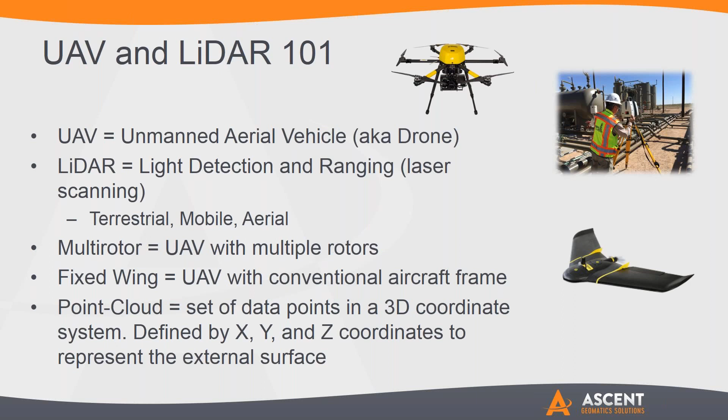And then ultimately, what we're gathering with all this data, whether it be UAVs or LiDAR, is point clouds. A point cloud is just a set of data points in a 3D coordinate system defined by X, Y, and Z coordinates. Essentially, we take this 3D model and we're able to deliver 2D deliverables, but we can also do a whole lot of other things with it. It's just a very dense amount of points that we can slice and dice any way we want to give the customers the deliverables they're looking for.

In order to be able to fly commercially a UAV, you need to have either a 333 exemption or Part 107. The 333 allowed us to get into this game very early on, a couple years ago, because the FAA mandated that if you were going to fly drones commercially, you needed to have an actual pilot there as you were flying, and luckily our CEO is a pilot, so that allowed us to get into this game pretty early. In August of last year, they created Part 107.

Part 107 allowed a lot of different people to be able to go out and get their remote pilot's license. They just have to go in and take a written test and pay a little bit of money for it. So that's good and it's bad, and I'll talk about that towards the end when we wrap up with recommendations. But we also have our Part 107, and we have a number of pilots in-house that have their Part 107 remote pilot's license.

BVLOS - a lot of folks ask, well, how far can these things fly, or how high can they fly? It's really not a limitation of how far they can go, they can go quite a ways. The limitation right now is this beyond visual line of sight. Currently there is a restriction from the FAA that you must be able to see the UAV, and not with binoculars or any other tools, you have to see it with the naked eye. So generally speaking, Owen, how far is it that you're able to see and not lose it? Well, if I'm clear-eyed, probably about 3/4 of a mile from my location.

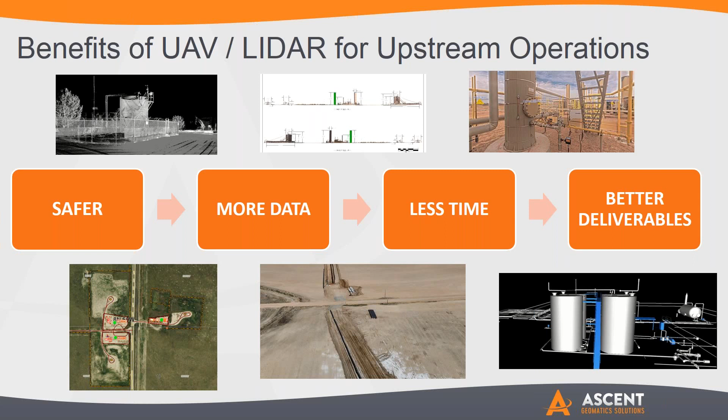And then better deliverables. Ultimately, we're still going to provide the 2D deliverables that our clients are used to getting today, but we're transitioning into also providing 3D deliverables that help them make different types of business decisions.

And then I would also mention engaging marketing. This can be good in a whole bunch of different ways from a marketing perspective. Pipelines have been getting a lot of attention the last couple of years, so being able to go out and fly that route and get information pre-construction, maybe post-construction, some of those things—but also to provide to maybe some of the landowners and things like that as well. So there's a lot of marketing sides to this when you capture that data, and everybody loves a bird's eye view.

No, I think public outreach is a big component—it's a side product we're getting while still collecting real survey data. We get all these visuals, and we'll dive into a couple of those here in a little bit. Kind of really wanted to go into the next steps of what a point cloud is and what we actually get out of all this data.

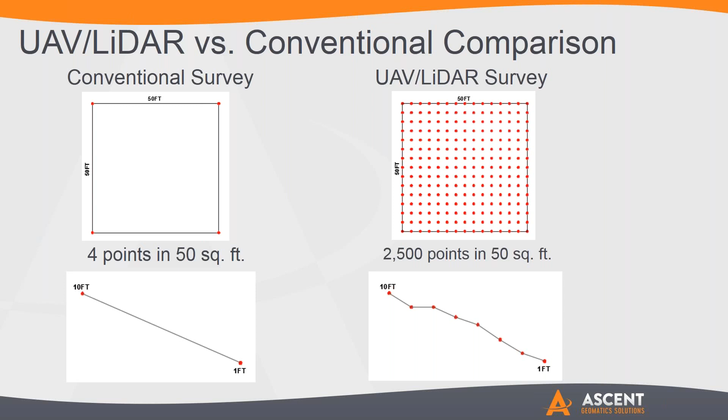Great. And so maybe we could talk just a little bit, Owen, about 2D versus 3D data.

Yeah, exactly. We're saying 2D in the sense that it's a two-dimensional plat, an alignment sheet, a literal paper-style product that everyone still needs to get work done. We're still going to produce that, and it's based on survey points, which again are 3D points, but it's just displayed and shown in a two-dimensional platform.

We're able to take this drone data, still produce that, and then create these three-dimensional point clouds and 3D meshes and all these other type of products, which you'll see on the right side of the screen there, that give a whole other element, which we'll dive into the benefits of - EH&S, progress reports, and enhanced routing and planning perspectives - here in just a little bit.

But the idea is that we can take the three-dimensional data on the right side and still transform it into the standard products that you would expect to receive. Great.

And then, again, some of the overall benefits that we have: location reconnaissance, that's huge when you're dealing with corridor concepts. There's a lot of features that could get in the way and a lot of different items that could cause either minor or major reroutes as you're diving into a site.

Most people hop in, use Google Earth, and try to plan out on the front end. That's a snapshot in time from a certain season - you may not notice a wet area or other potential items that could cause issues. Location reconnaissance is huge in order to get enhanced route planning using these types of technologies.

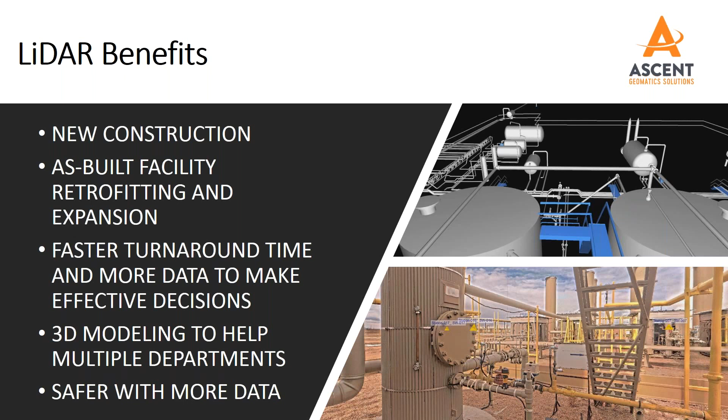Okay, great, and thanks for that, Owen. So next, what we're going to dive into - again, high level - and then after this, we'll get into a lot of examples. We're going to be showing a lot more media and visual examples of what this actually looks like.

But just for the sake of understanding high level, where are some of the applications for UAVs in midstream? Michael, you want to talk to this one real quick? Yeah, so the basic tenets of using UAVs for midstream is on the front end - it's very applicable to doing route planning.

Typically, our workflow, we get a KMZ or something from a client, and we can go ahead and plan out our flight for that KMZ. But during that collection, we're collecting a much wider swath.

We can go back and review that route with the client and make minor reroutes based on cultural features or topography that we pick up during those flights, and finalize those routes. Due to the fact that we collect such a large swath, we're able to stay within the data set collected, while conventionally we'd maybe have a 200-foot wide window. So routing around features not on Google Earth while we're in the field, we're able to leverage that data collected and do reroutes on the fly without having to go back and collect that stuff.

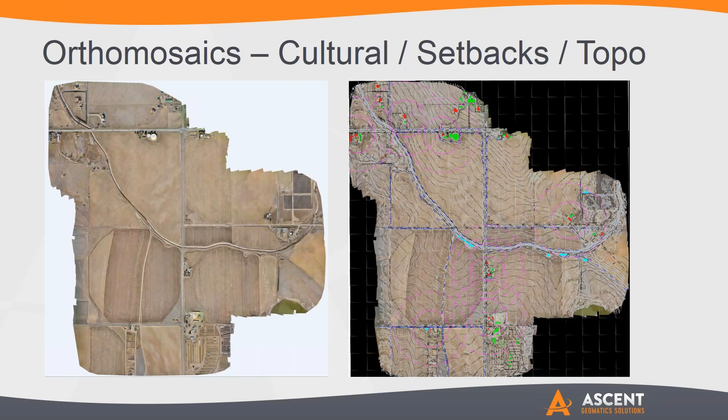And if we're able to fly it when it's either brownfield or in the off-season of growing, we can tighten it down from there as well - we can get down to values of maybe just around a couple inches plus or minus, which for a lot of the work we do is great intelligence.

Okay, great. All right, I'll let you off the hook and move to the next slide. So what are we looking at here?

And just to make the distinction here, we're not telling folks not to use Google Earth. There are purposes and reasons for using Google Earth, maybe even pre-planning, just kind of generally getting an idea of where we may want to put this. Certainly you could use Google Earth for that - we do that ourselves. That's not how we completely plan out.

But the idea is that we can go and take this imagery, and you literally get a KML from us, and you can plug that in, and you can have all your Google Earth features with that new imagery under it. And I think we actually have an example of that right here - yeah, there's a great example.

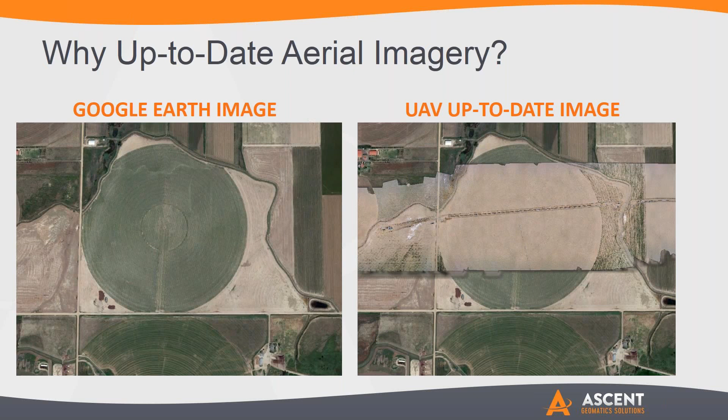So when we say UAV up-to-date image, it certainly was up-to-date that day. Just for kicks, I pulled up Google Earth yesterday, and that's actually what Google Earth still shows as of yesterday. So as we all know, using Google Earth, it can be 3 months or 3 years old - you just never know. And obviously, as you get further away from metropolitan areas, the less updated it really is.

Okay, so let's look at an example here, and I want to preface this next piece. This is a video that we're going to be showing. It'll be really smooth on our computer here, but it may look a little choppy going through this GoToWebinar connection. So if it seems like it's coming through a little slower, bear with us. If you'd like to see what this looks like in real time, let us know.

Now, before we show this, I think it's important to mention what we're actually looking at is data. We're looking at data that also has that combined imagery to it, but this is not one of our drones that's just flying and taking video. In fact, you can see off to the edges there that it's not.

This is kind of during construction, but in basins where there's a heavy corridor, this wouldn't be uncommon - this is your planning phase where there's already construction going on and you're trying to abut against it. So what we're really trying to show is when we're doing the planning phase, we can see roads, like for instance, we just went over that we're going to have to bore, which was a bore we just did.

You can see in the far off distance a landowner that we had to bore completely because of restraint. If we weren't able to get permissions there, we'd collect that data anyway. This is the actual data underneath that mosaic, and we're able to pick up numerous amounts of data. The width is closer to a quarter mile, so if we had to do that with boots on the ground, it would be exorbitant.

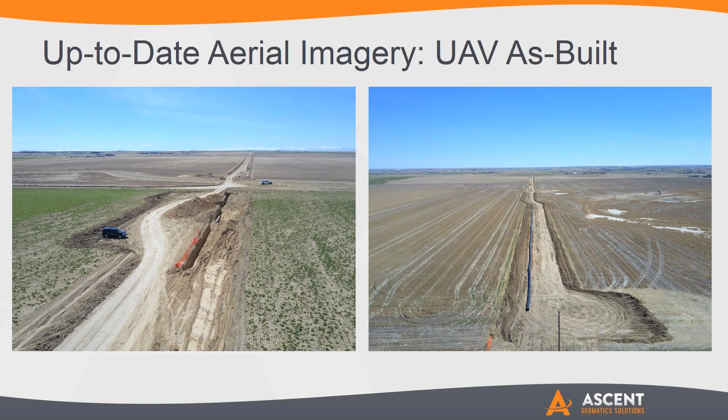Just to point out, if we're out there collecting updated orthomosaics or getting anything for versions of progress, sending a bird up to get these type of photos or literal video is really quick and easy, because not everyone can be on site at the time. Someone sitting back at the office may not be able to see the construction progress, and a point cloud may not be the right vessel to portray where it's at. It's a great progress and as-built tool that only takes 2 minutes to get done while already there conducting a survey or an aerial orthomosaic.

So this next one, this 3D point cloud fly-through, now we're actually looking at, and we're jumping ahead a little bit, this actually has LiDAR data in it. Owen, you and I were both on location here, but you were actually doing the data collection. You want to walk us through this one as I hit play?

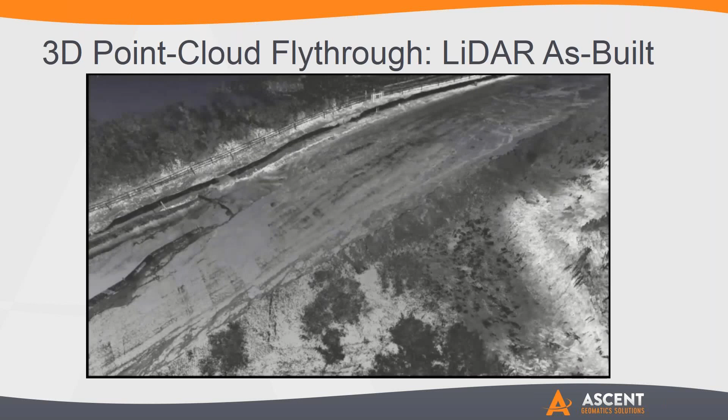Yeah, definitely. So again, this is a proposed corridor, and right now this is obviously, as you can see, an as-built under construction. It was paralleling an existing utility corridor, you can see the transmission lines there. We gave a little aerial view there to give you perspective on what the LiDAR data is showing. Essentially, what we were able to do is go out, and in just a little bit you'll actually see the collection method itself. We collected this with LiDAR on a backpack, so it was a mobile LiDAR system that we can use to measure out the size of wire and the sag of wire.

We can calculate into that disturbance to see if we're staying within where we're permitted and legally allowed to be, and figure out if there are additional data pieces we can collect on the front end for routing, and also once we have that control, collect it for the as-built or progression. You can actually see right now there's a guy down there with a backpack.

That's the system we use that we can just walk around with. We get all that detail in the bushes and shrubs down there, an immense amount of detail, all off of this path, which was probably 15 minutes worth of walking. We use that on corridors, and then we can also use it for facilities. It's detailed enough that we can actually collect valves and small pieces that require millimeter-style detail and accuracy.

So moving along, another area here, Michael, maybe you can speak to this vegetative regrowth concept. Sure. I think you saw where there were some disturbed areas, and since this is always georeferenced data, we can overlay our proposed route to that and see any deficiencies or construction outside those routes. So we can utilize that data with our right-of-way agents to let them know they may need to pick up some more temporary workspace during construction based on reroutes or whatever.

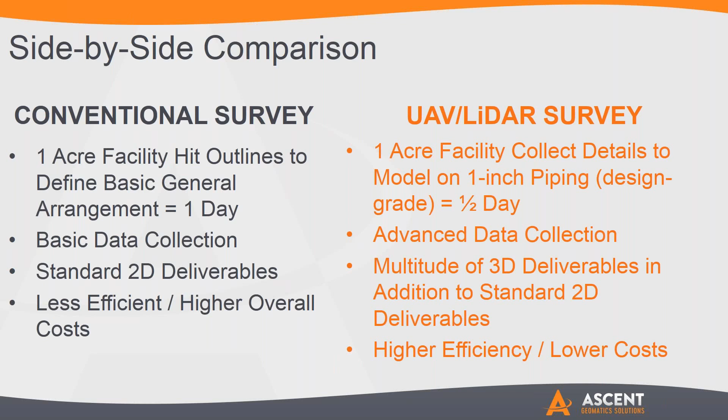So on the left here and then on the right - what do you need? You need your standard facility drawings, your general arrangements, your ISOPAC drawings, P&IDs. All of those we can still produce out of these 3D data sets, but we can also turn it into a real 3D actual modeled facility like you'll see on the right there.

This is a location that a client asked us to do a full model project on. You get the piping, you can get down to flange details, so if there's fabrication to be done, we can tie in and help them with the manufacturing of that based off real data that we collected months ago.

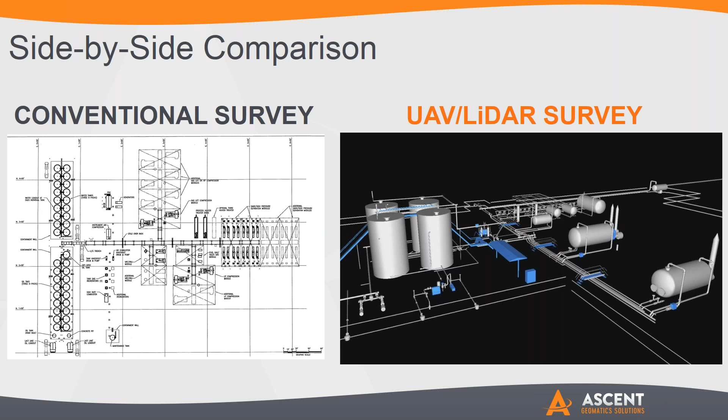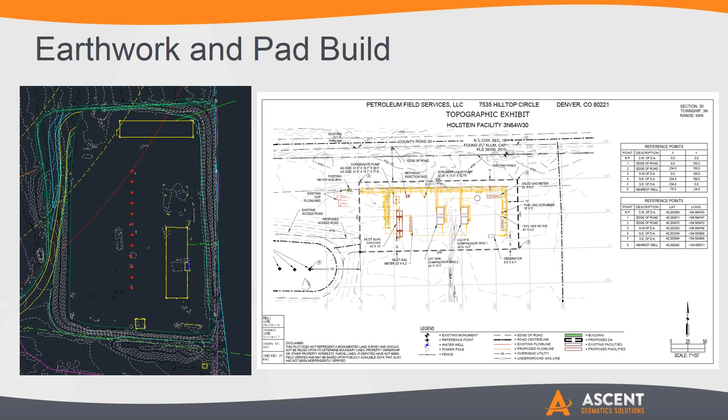Ultimately, with these items, if you're building a new location, you'd like to think that your crews built them as you planned. So you still are going to create a grading plan style product on the front end. They go out, they build, compact, add on whatever base they need. If we go out and refly a location, since we've already been out there, we can update the elevation data so that if your underground piping models or above ground facility models need to be adjusted because of vertical differences created during construction, we can use that to update the model up, down, left, right, and make sure it goes in exactly where you want it.

Okay, great. So maybe we could take a look at a couple of these examples and show examples of as-builts that we've worked on with some clients.

Yeah, definitely. You'll see here - this was taken from a photogrammetric data set, an existing pad that was under construction, being drilled out, and then a production facility being put together to go online. The nice thing about this, from an EH&S standpoint, if someone back at the office wants to look at what's going on at the site, you can see if BMPs are being followed, you can see all the swales and berms, and you get all this data on the front end.

And at the same point, you're still getting the actual survey data for the as-built itself that you need to create those tangible deliverables or models further down the line.

So if I can jump in, we're looking at the as-built from a higher view - let's call it a 400-foot view, getting that as-built, because everything we're looking at here is data. Yes, there's imagery coupled with it, but this is all just a massive point cloud, what we mentioned before - point cloud. This is just a massive data set.

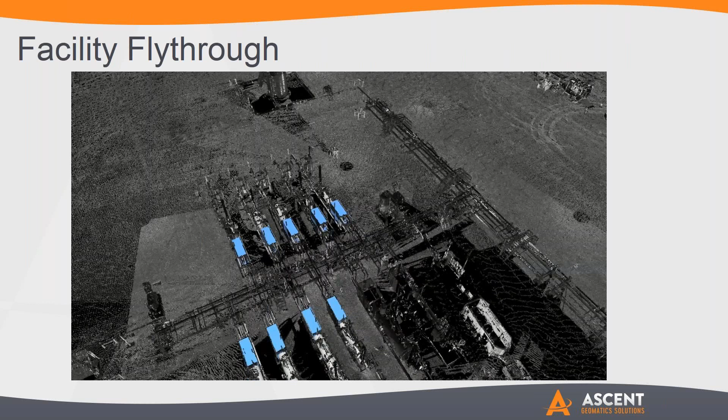And then what we're able to do is take it one step further, maybe not from a 400-foot view, but down to a millimeter type of view. We can take these photogrammetric data sets we get from UAVs, along with the LiDAR data sets we get from mobile or terrestrial LiDAR, and combine these. So now we can take it from 400 feet all the way down to literally a millimeter view, and get a better understanding of what is actually going on in this facility.

You'll see blue, you'll see white. This is an example, I think we have in a couple slides, where we show a facility that's fully modeled. But this is where we've shown how you can start to model some of these different areas of the facility.

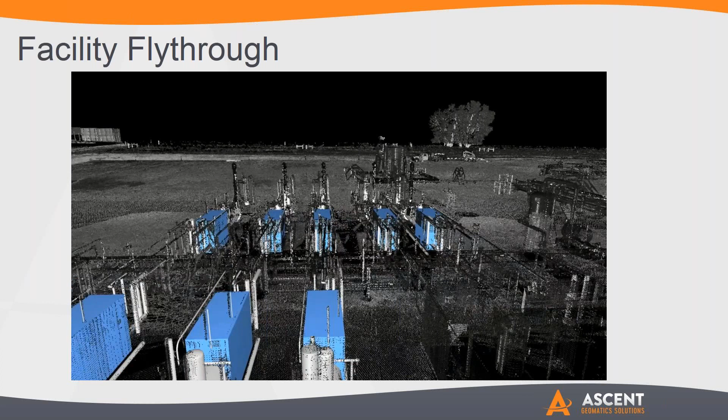Yeah, I think you hit on all those good points there. So next, maybe I'm going to see if we can do this. It's the first time I've tried to do this, so we'll see if we can show our TruView. But maybe you could talk through this, and I'll go ahead and see if I can pull it up here.

Yeah, so the actual LiDAR data set that we get on the ground with these static units, we have viewers online that someone can get a login and go to, and they can literally become the head of the scanner. So it's almost a street view, Google Street View perspective on these locations. You can click through the different setups and stations we are at, go in, we colorize them, and get them completely registered together.

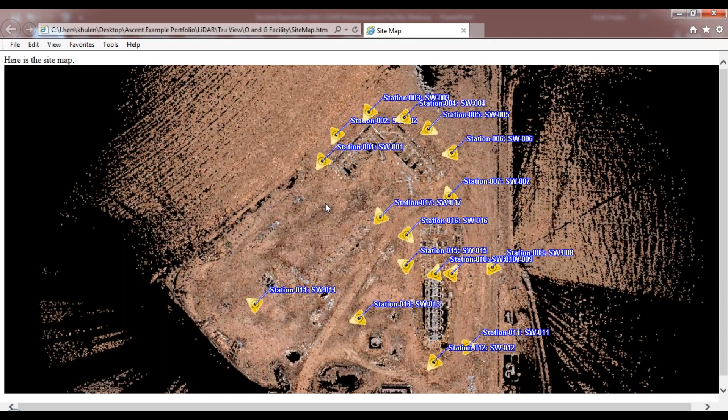So it is actual... oh good, there we go. You might be seeing that on the screen now. We're trying to get a real perspective that you can measure within this colorized point cloud. You can see points. Someone can pull this up on a tablet or smartphone and be inside the facility, and Keith here can click on this and show you what we're talking about.

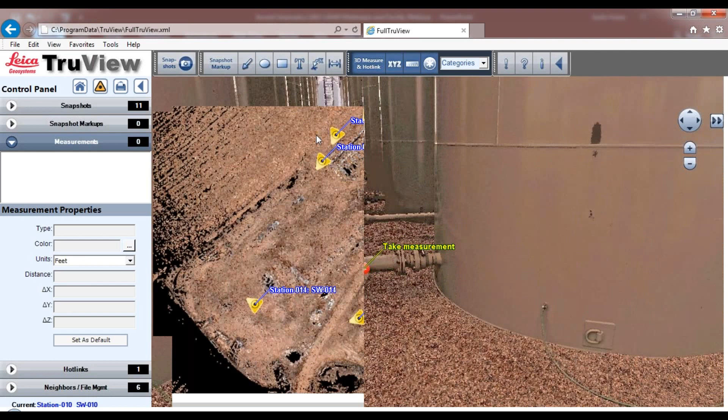So this is, once again, millions of points put together, overlaid with imagery that we collected at the same time. This gives you that boots-on-the-ground perspective without actually having to be on the facility. These units are also completely intrinsically safe, so we always take safety into account when collecting this type of data. Then ultimately, you can register actual measurements and share and annotate them with your crew and work group as well.

Yeah, so this is a request that we actually get all the time, right? What's the bolt pattern, what are the dimensions, what's the size of the flange? There's a lot of information you wouldn't get in a conventional survey, or it'd be really hard to portray that type of information. And with this, they can go in and pull that.

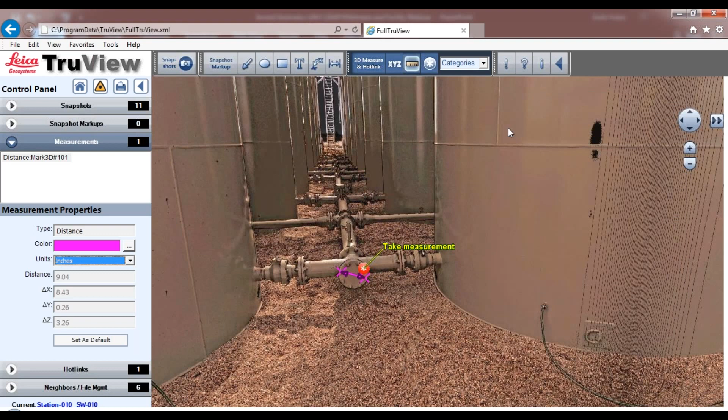And if they really do need detail, and they need that model to fabricate on or add on to it, we would just take that data and extract it out. We're not going to always go and model an entire facility if our client doesn't need it. We're going to give them the pieces that they need and want, extract that information and serve it up. And when they want more information, we'll be able to provide that.

And that goes for whether it's a LiDAR data set or one of those UAV-based photogrammetric data sets. We're not going to give you everything. We're going to give you exactly what you need at the time, and then have all that information available for when changes do arise. And over here, when we talk about these stations, these yellow triangles, we're able to just run through really quickly and basically take a trip around here.

We don't even need to be sitting there. So for operations that run out of Houston or Oklahoma or wherever, and the site is in North Dakota, it's a great way, as long as you have internet and a username and password, to be able to get in and actually see the facility firsthand.

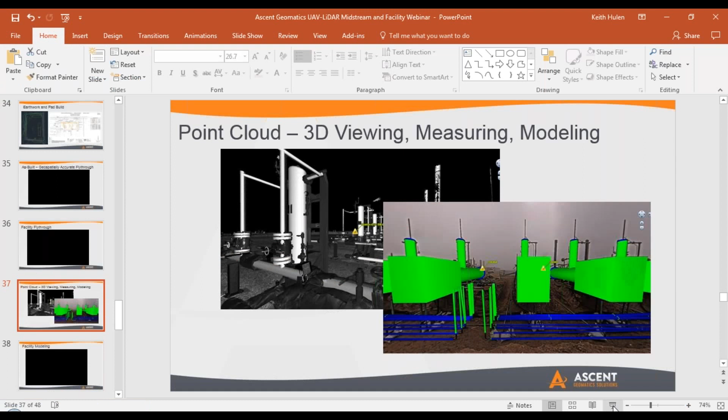Okay, so let me switch back over to the presentation here. Hopefully this will go smoothly.

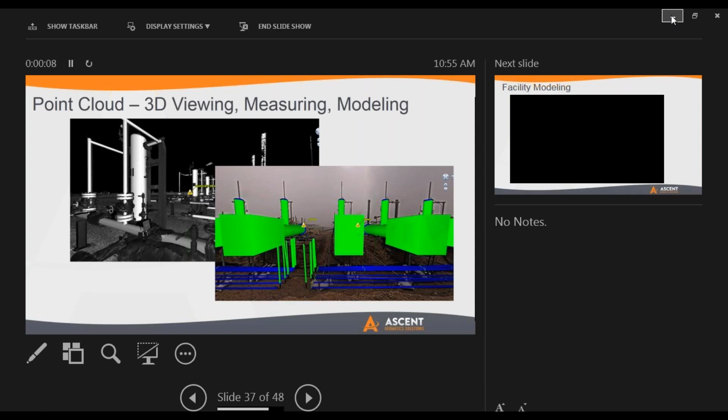All right, let me... okay, so let me just change one thing here. Here we go. Okay, so back to it.

Maybe we could talk now a little bit about modeling, if you don't mind, Owen. Yeah, we'll just run through this really quick, but this is yet another example from a client we've worked with where we were able to put together a full 3D model that you'll see here.

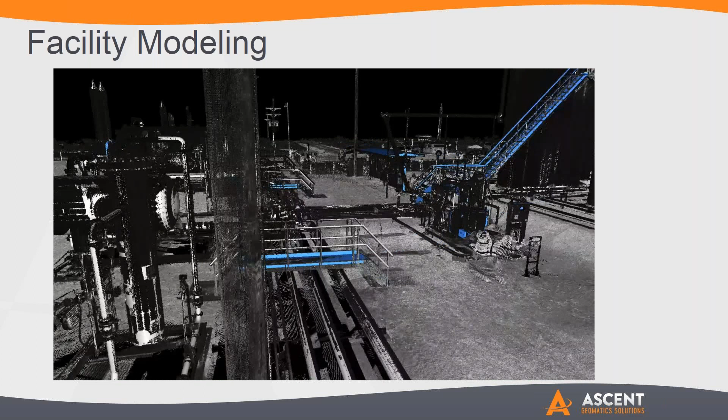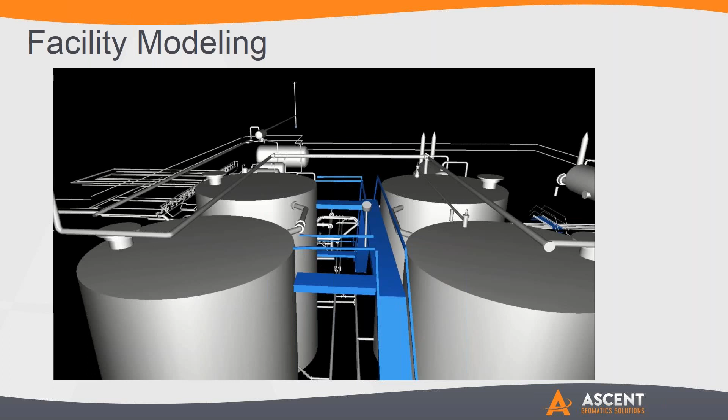You can get every level of detail. We can model down to a really fine level of detail or keep it at a certain perspective. So do you need all the way down to your small half-inch conduit wiring, or do you just need to know where your main piping infrastructure is?

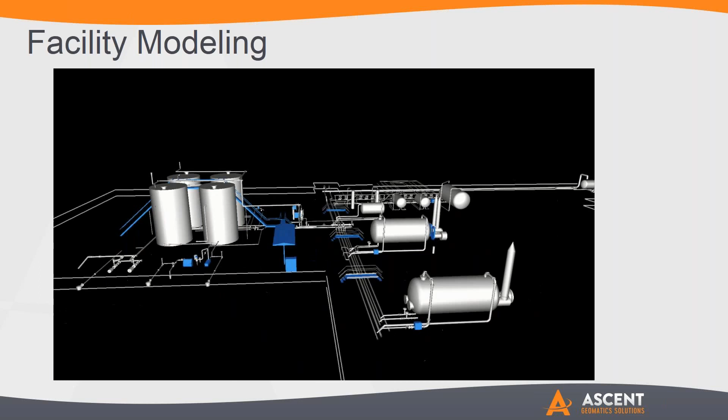It's just something that we work out on the front end. We always figure out what you need to get to in the end, and we work our way back, and that determines how we approach it from the field. So it's always that farm-to-table perspective, we need to know what you need, so we can make sure we collect it and extract it exactly to your standards.

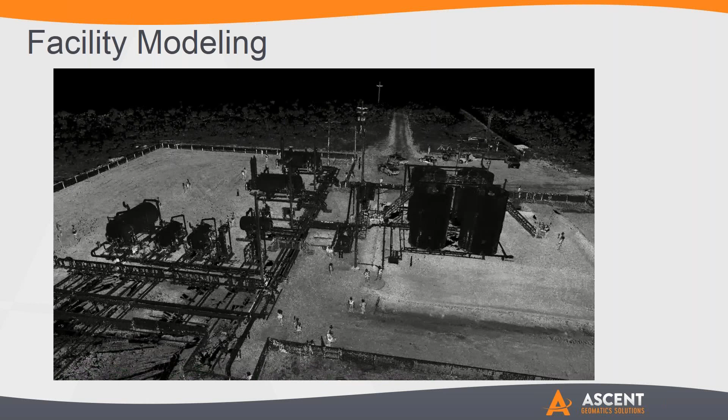Great. So a couple real quick things here. Obviously one of the safety factors, staying out of the trenches, is a big concept for us. We've been working with a lot of providers on all this scan data that you see here.

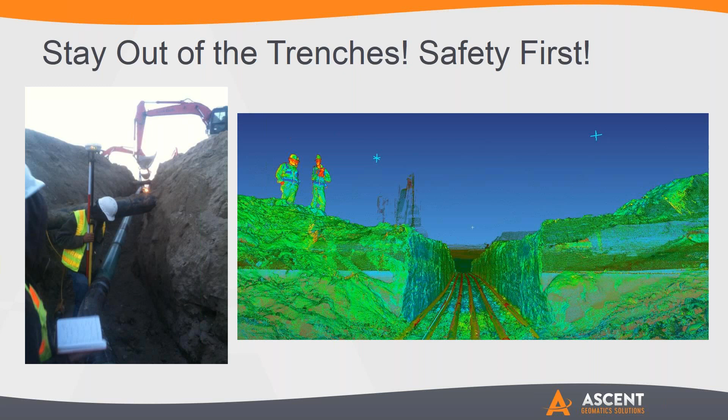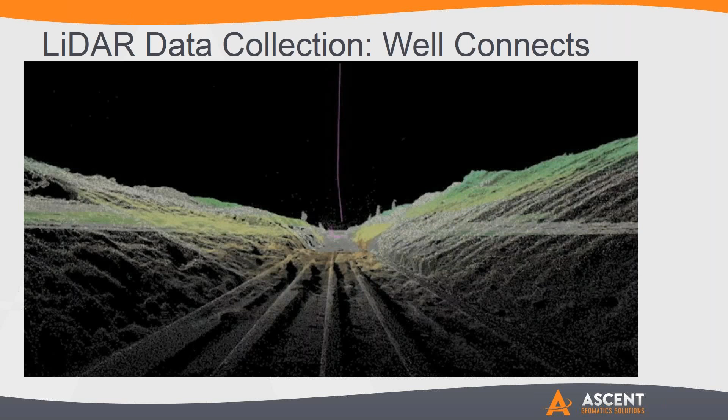We're able to get it as it's going in the ground. And then here, once again, you can get these trench perspectives without actually having to have a single person in the trench. These are all collected from outside a trench in safe zones, but we can give the client that perspective.

Okay, great. Real quick, layouts and permitting. Once again, Michael already touched on it. We can come up with different view types to help enhance USR and municipal, county, any type of permits that are needed for both facilities and on the midstream end.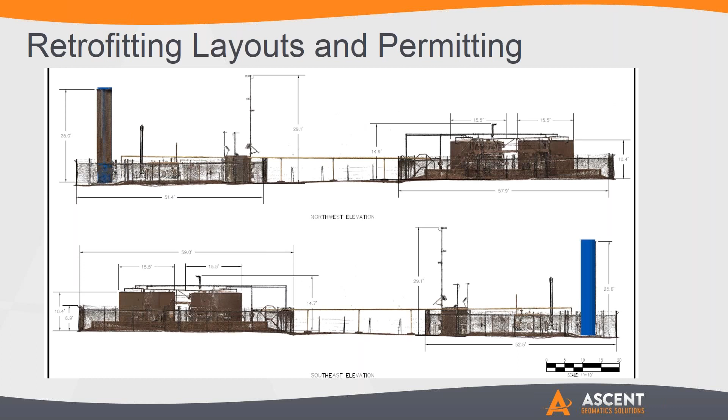And obviously, adding all this into an asset management system goes without saying, but we provide services there if you guys would like to hear more about that. Obviously loading all this into a GIS system is critical as we move through. Anything Michael or Owen you'd want to say on this?

Yeah, there's always customization that you can do. Whatever product you need, we can output it. It's different data for different needs.

Great, so again quickly, various deliverables. We're still giving standard deliverables. I hope that if there's anything you take away, if you're used to getting 2D as-built plats, you can still get those, we're just taking it out of 3D data. It's everything else - the point clouds, the feature modeling, the orthos, the up-to-date imagery, and the fly-throughs, all these other different types of byproducts that you can also get that we can also deliver.

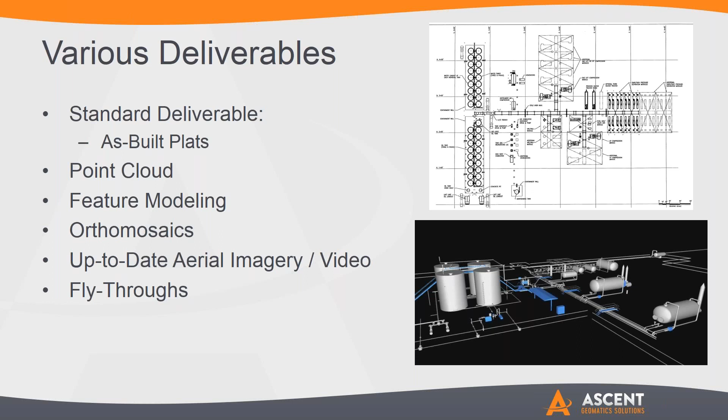So kind of recapping here, we do take a blended approach to this. It's not one tool for one job. A lot of times we're using a blended approach where we're using UAVs, we're using LiDAR, and we're using conventional methods. It really just depends on the deliverables that the client is actually looking for. And that kind of leads me into some of the recommendations.

Number one, obviously I'd recommend working with a company that's got oil and gas experience without question, so the terminology, experience and expertise is there. Two, survey firm - with the Part 107, there's now 150 companies just in Denver alone you could probably call to go do flying with drones.

I want to make a clear distinction here. We're talking about gathering geospatially accurate data, survey grade or if not design grade type data that you need to use to make business decisions. We're not talking about videos and just imagery and pictures.

There's a lot of companies that do that, and I would recommend, because we get these calls every week, that you work with a company that understands that this is still a survey that needs to be conducted. That seems to be where a lot of companies fall short, and they don't actually get the data that these other firms or operators are looking for.

Full service collection, analysis, and delivery. So this isn't just about flying drones. There's a whole other back-end component to this, which is processing the data and actually extracting out the features and what the client needs, and then giving a deliverable.

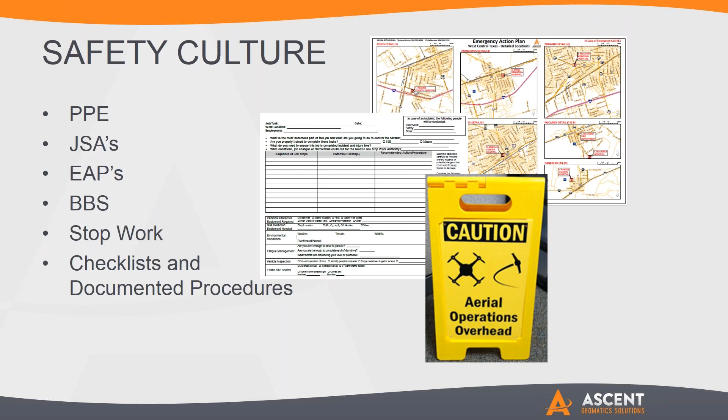This is very important. Working with a company that's going to be flying equipment over people's heads or properties, it's very important that they have a very intense safety culture, as well as checklists and documented procedures. You can see one of our signs here we use when we go on site for aerial operations. Having all those things in place really separates companies that know what they're doing here from companies that do not.